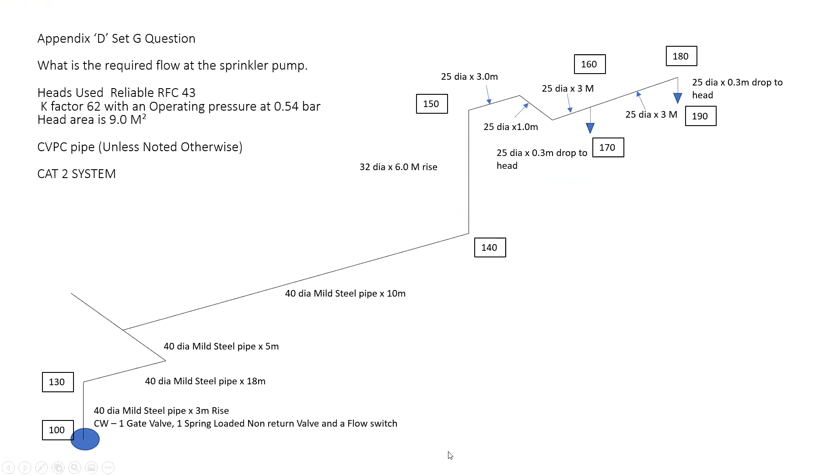So we open Canute, so just open that, and we're going to say File, New. Project name, so we'll type in here 123 Anywhere Road. Okay, and the address is the same. Project number would be 1234. Designer's reference is D.Duck.

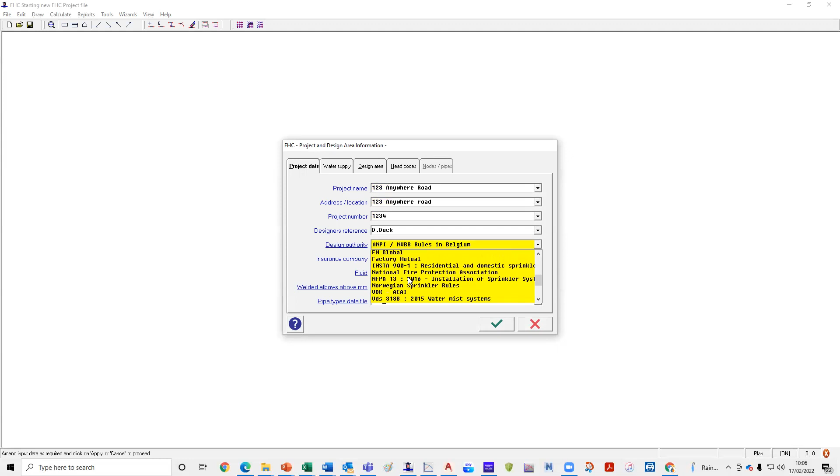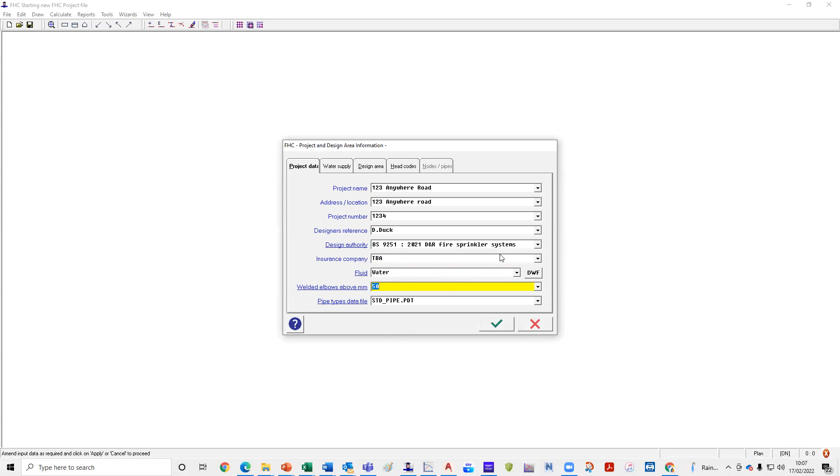Okay, design authority. Now you can select anything here. So what we're actually looking for is BS 9251 2021. See that there? So pick that. Insurance company, we'll put TBA. The fluid's going to be water and welded elbows, I will just say over 50mm. Okay. We'll leave standard pipe sizes in just now. I would suggest you don't put the water supplies in. You can work that out at the end.

Go into your design area and we'll put in here most remote. We're only going to run a most remote calculation on this one. However, if you have got a pumping tank, you'll need to do one for most favourable. Installation number 1. Hazard classification, you've got a drop-down menu, so we'll just put domestic. Design density for this one, because it's category 2, is 2.8mm a minute. And because we're running off head numbers, we'll not put a design area in.

Drawing number, we'll just put your drawing number in there, 1234 Rev 1. Issue number, that might be A, and then any comments in there. Okay, so we've done the project data, we've done the design area. Okay, now just while we're in here, we can look at the head codes, and the standard head codes have been loaded into this already.

Okay, so we'll tick that, and when we tick that, we will get a start node. 100 always starts at the pump. Click OK in that one, and then it'll ask you to save it. So I'm just going to put that in my desktop just now. Okay. All right. So this is how we start. Start node number is 100, and then end node number is 110.

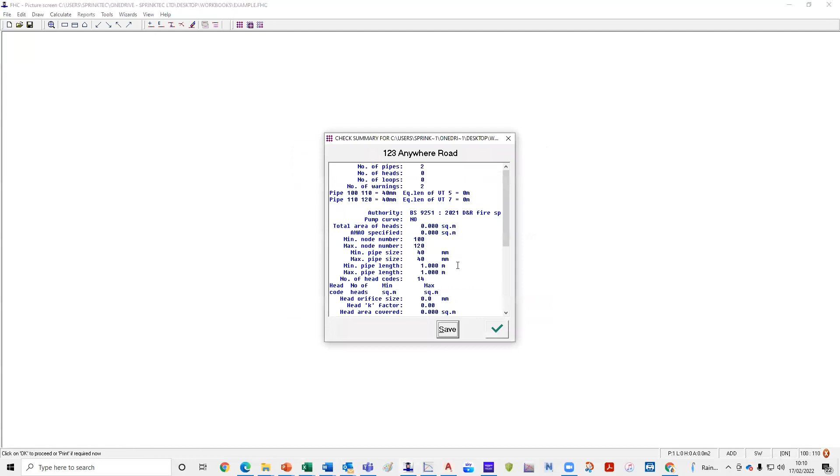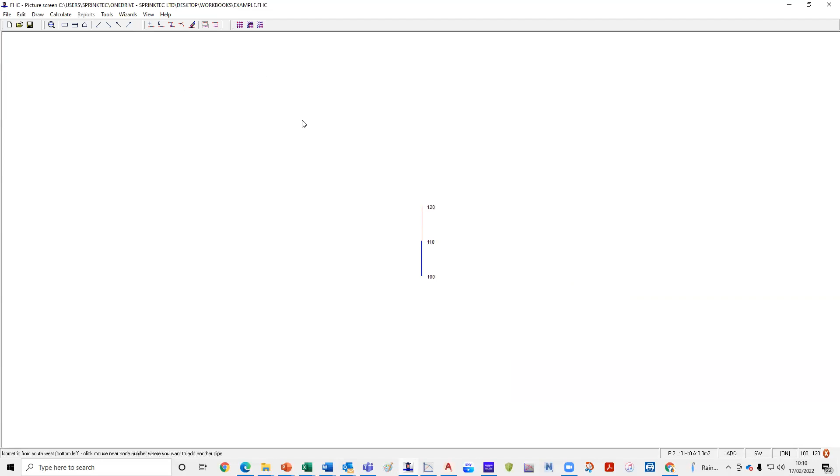You right click, you can just look at the pipe lengths, and you can also look at the pipe sizes. And if you go in here, if you look at fittings, it'll give you gate valve and NRV for check valve, basically. Okay, come again, click the top of it, up, 1 meter again.

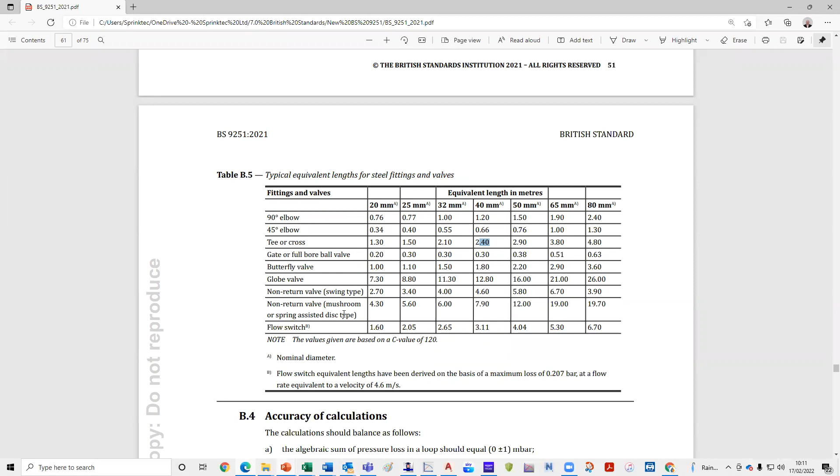At this point, we're going to add a flow switch. Now, interestingly enough, the flow switch here isn't in here. Okay, so what we need to do, we need to go into our British standard, and in our British standard, that's for steel fittings. If we go to 40 mil pipe flow switch, the equivalent length of flow switch is 3.11 meters.

So we'll get rid of that. And what we'll do here is we'll add in here an additional length of 3.11. Okay, and that's the equivalent length of a flow switch that you've added. Okay, smashing. Okay, so that's us up here.

Now, once we get to the top of the rise, what we want to do is click here. At this point, we're going to go east, and then at that point, that is 18 meters. So what we can do in there is say 3 meters. Okay, we're going east, 40 mil, mild steel pipe, and at this point here, we'll just add in optional items, and to keep it nice and short, we'll put in 15 meters here.

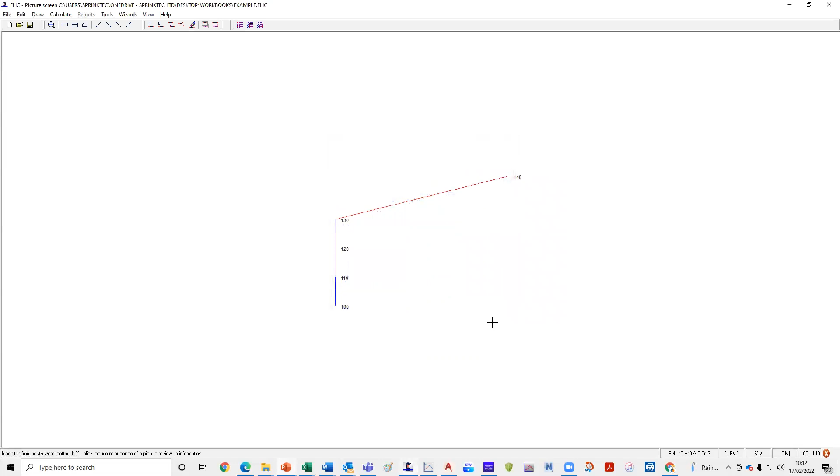So that gives me an extra 15 meters. However, when it draws it out, it's going to keep it nice and neat. Okay, so 3 plus 15 is 18 meters. We'll tick that. Okay, and then we'll add another pipe here. At this point, we are going to go north. Okay, and we've got 5 meters there, so put 5 in.

Tick that. Okay. Now, because on the drawing it shows it as a T, what we need to do is go north again and just put a little meter in, and that will then indicate that there's a T there. Okay. Righty. Again, click this part here, and that will give me the node number at 150. We're then going to go east again. At this point, it's 10 meters.

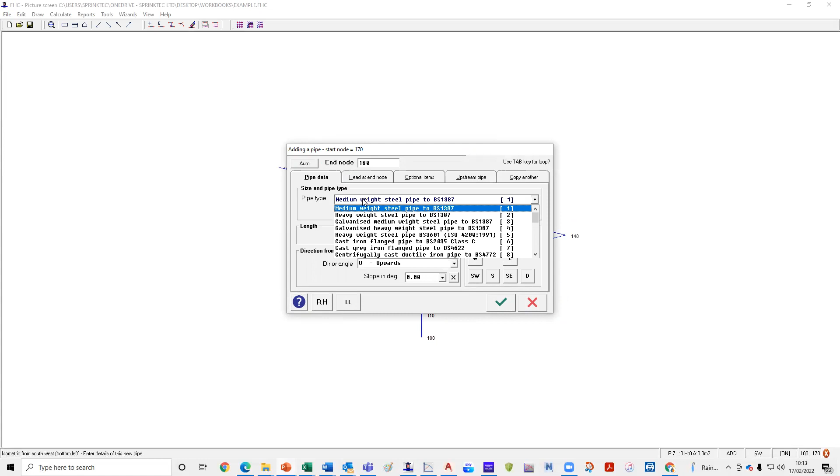So again, we'll go east, click that, we'll put in 3 meters again, and again, we'll go to optional items and put in 7 meters. Okay. And then another pipe, we'll come here. At this point here, we're going to go up, and it's 32 mil. So at this point here, we actually change to CPVC. So we'll come down here and we'll select that pipe there.

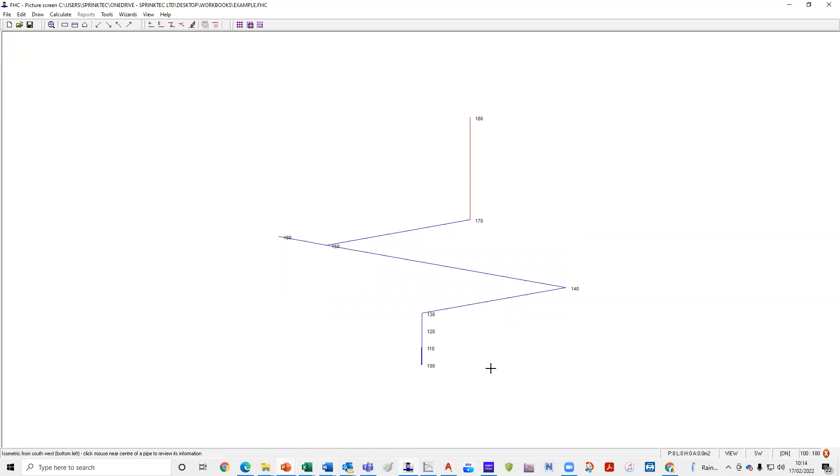Okay. So once you select that pipe here, basically you would come down, click here, 32 mil pipe. We're on the rise, and we're going 6 meters on the rise, so we'll just make that 6. Okay. What I would say though, you can't put equivalent lengths on rise pipes. It has to be the actual rise pipe itself.

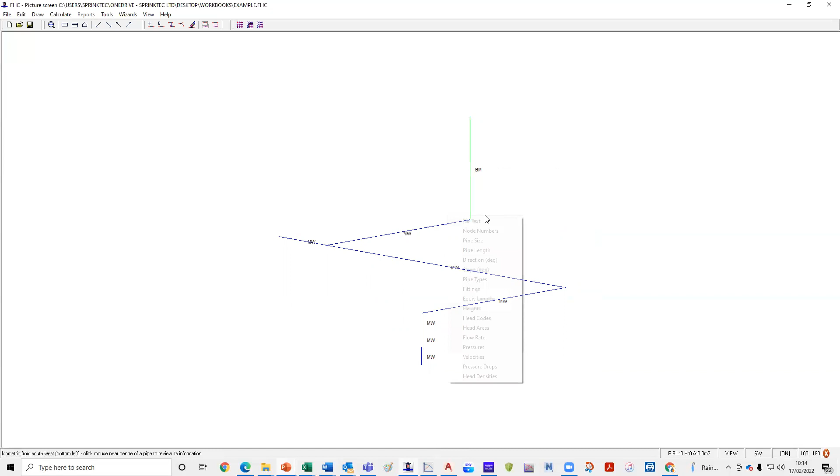So we'll do a quick check here, the pipe lengths. We've got 3 meters up here, 6 meters here. We've also got pipe size, 40, 40, 40, 32. And then you can go in here and say pipe type. Where is it? Pipe types here. See that? Medium weight, BlazeMaster. Okay. Okay then, so we're happy.

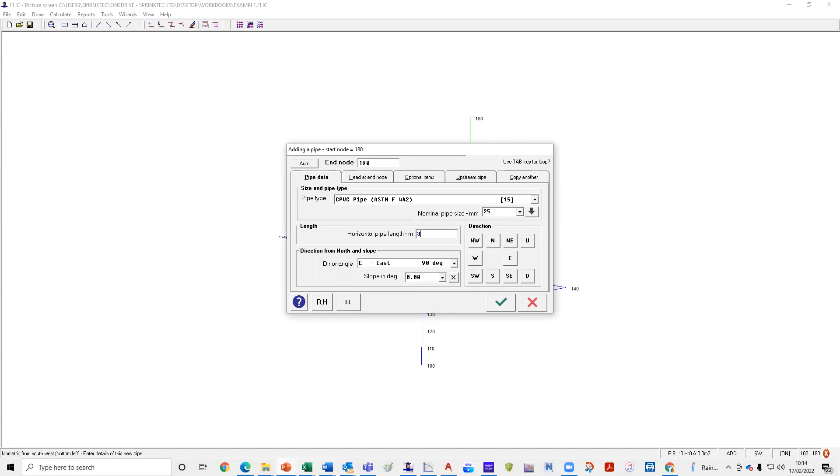We'll add another pipe here at 180. And we're going to go south this time. No, we're not. We're going to go east. Right, so at this point here, it's changed to 25. And we have a 3 meter long pipe. Okay, so tick. Then we add another pipe here. Okay, 25 mil pipe, and it's at 1 meter, so 1, tick.

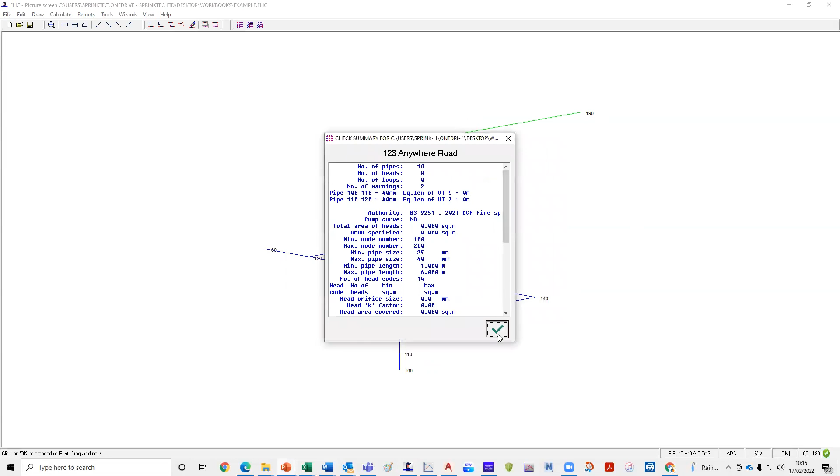Okay, and again, we're going to add a pipe here. And this point, we're going east again. And then we're going to go 3 meters, it's 25 mil. Okay, tick again. Okay, and then we've got a drop pipe to a sprinkler head here, but we'll come back to that. We'll add another pipe here. We're going east again, coming there, and that's 3 meters also. Okay, so tick.

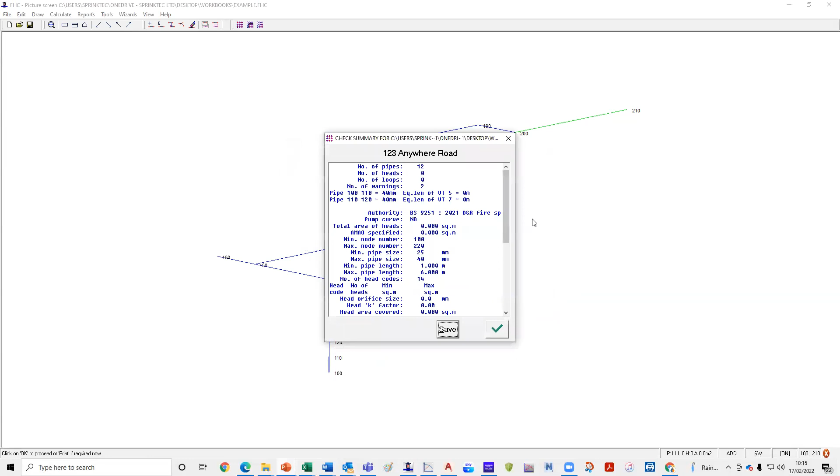Right. So this has done most of the sprinkler pipes at the moment. So the next thing here is we want to double check we've got the head. So it's a K factor of 62 operating at 0.54 bar. So if we go in here and go to project data and go to head codes, we want to look for that pressure and that K factor.

So the K factor's down here and the pressure's down here. So there's nothing here that says 62 at that pressure. So we're going to need to add one. So we'll put in here, add. The orifice is the thread size, so that's 15 millimeters. The K factor, which is on the question, is 62, and the minimum pressure at that head is 0.54 bar. And we'll make that a reference of RFC

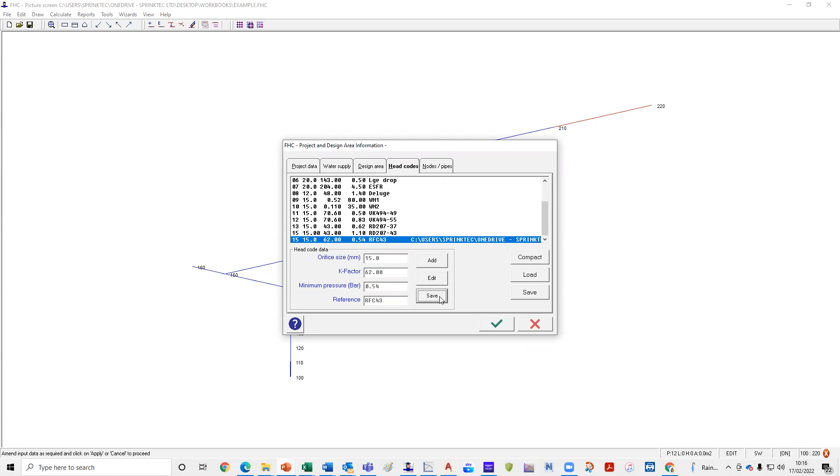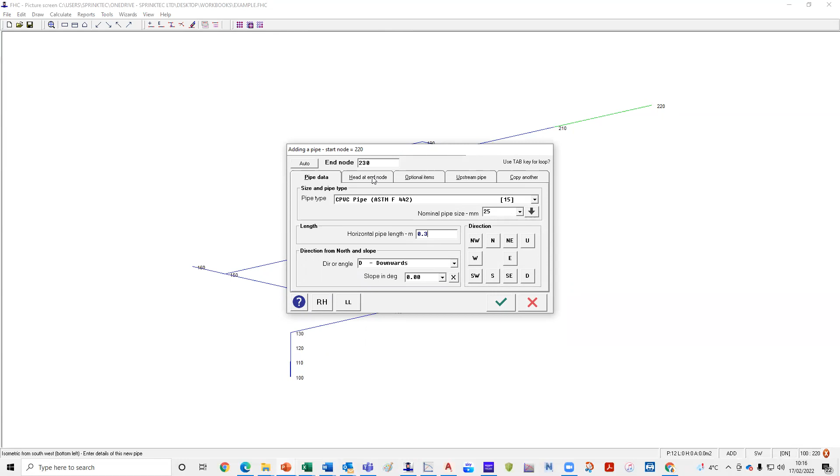43. Okay, we then save and add. Okay, and close that down. When we get to here, we click down here, and we're going to go down. And at that point, we've only got 0.3, so it's 300 millimeters, so it's 0.3 meters, 25 millimeters. We then go to head, click this down, scroll right down to the bottom, select RFC 43, and put in here the head area, which is 9.

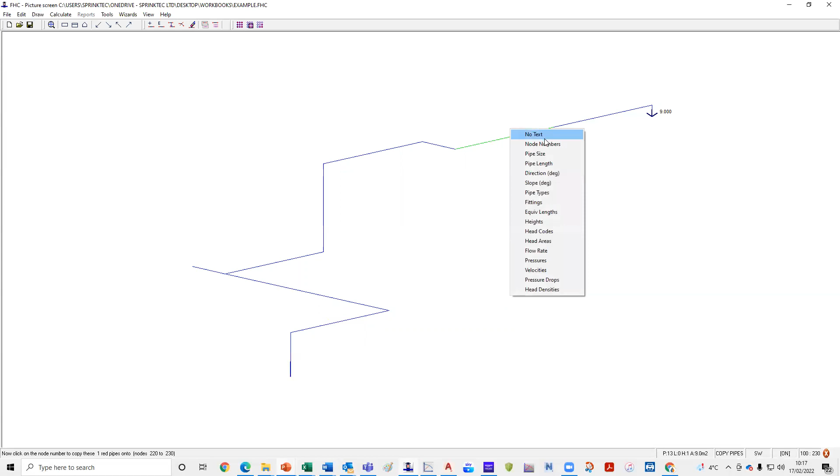Okay. And we'll tick that. So you get the head at the bottom of the pipe here. You can right click on that and you can put head codes, that's 15. You can check head areas and here, which is 9. Okay. Now, the one thing you can do here is you're going to draw, and then you can say copy by selection. Now, if I select that here, it'll pick that pipe. If I say node numbers, then I want to click here, put node numbers in here.

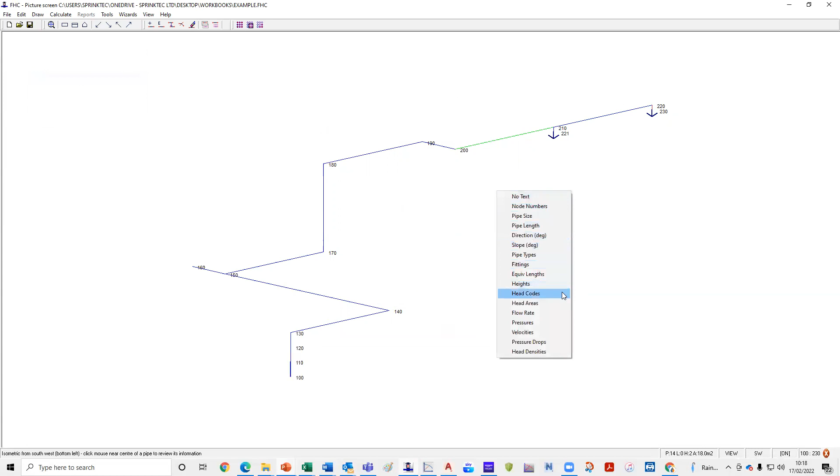So draw, copy by selection, or Control C, any Windows program. You hit tick, and that puts the head in here. So there we have it, we've drawn it out. Okay, so that's fairly easy. Right click, you can just run through it, check your pipe lengths, check your pipe sizes, check your pipe types, head codes, all that lovely stuff. So pipe types in there. And just double check it against your drawings.

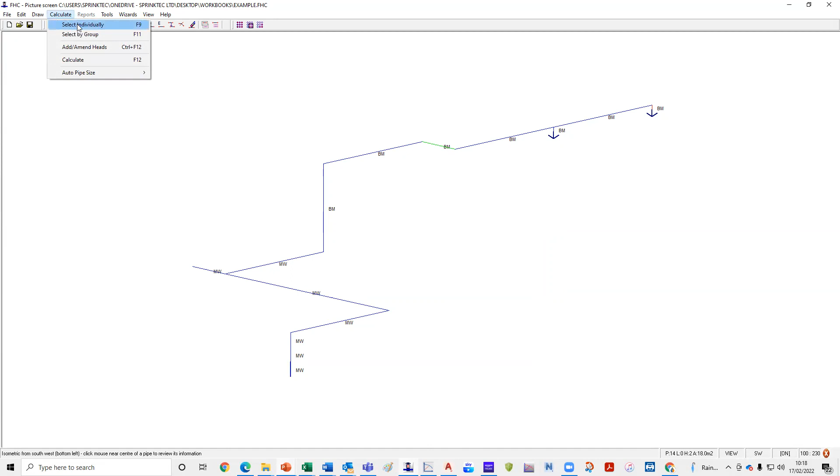Okay. Right, so what we want to do here now, we can go calculate and we can select by group. So you can either click that and then you just draw a square around it, or you hit F11 and draw a square around it. Okay, at that point there, you can either click that button, you can either go into calculate, or hit F12. There's 3 ways of doing it. I tend to pick F12. Okay, calculate. When you get that, it will tell you 2.8 over an area of 18 square meters. So that's the 2 heads in operation.

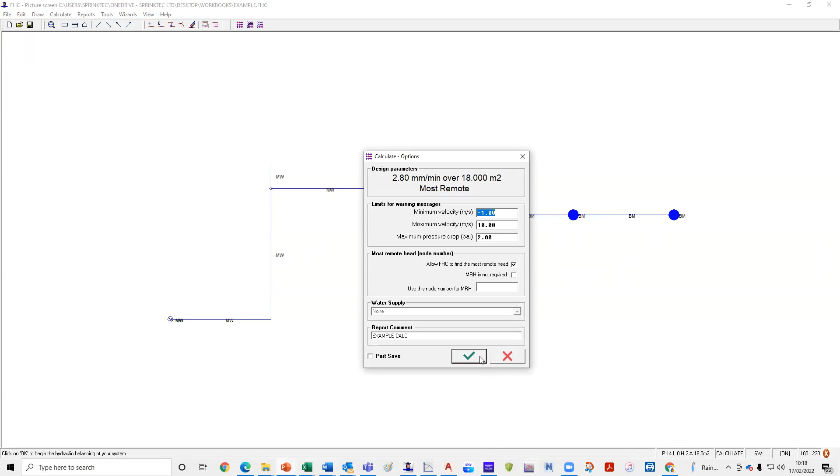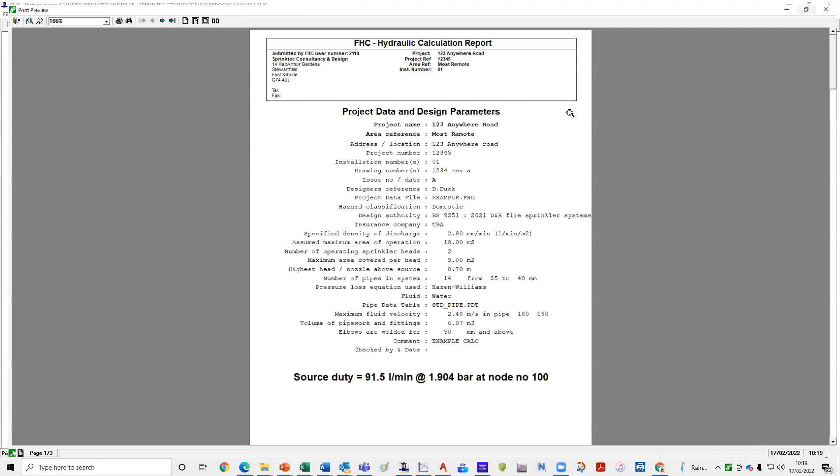So you'll say tick, and that will tell me that the flow that I need is 91.5 at 1.904 bars. So tick that again, that'll close it down. If you go to reports, calculation reports, it'll give you the details here. Okay, so that tells you the most remote area, 1, 2, 3 Anywhere Road, Donald Duck, domestic, and it gives you all the details here. Also tells you what the maximum velocity is through the pipes and the volume of the pipe. Okay, so yeah, that's that.

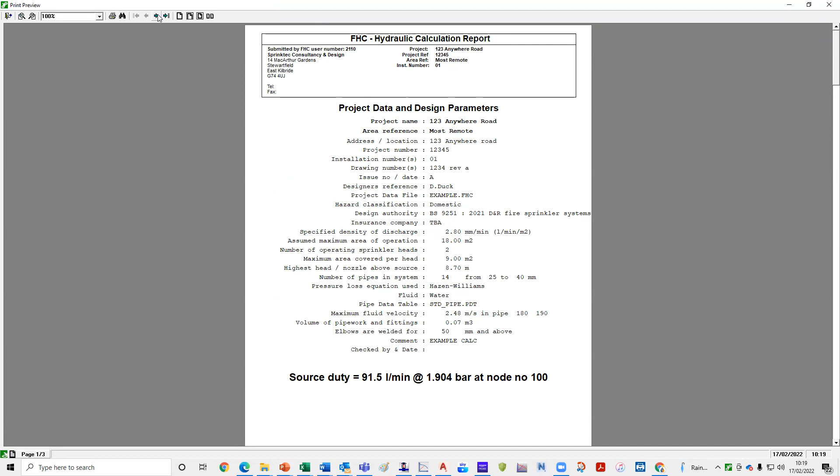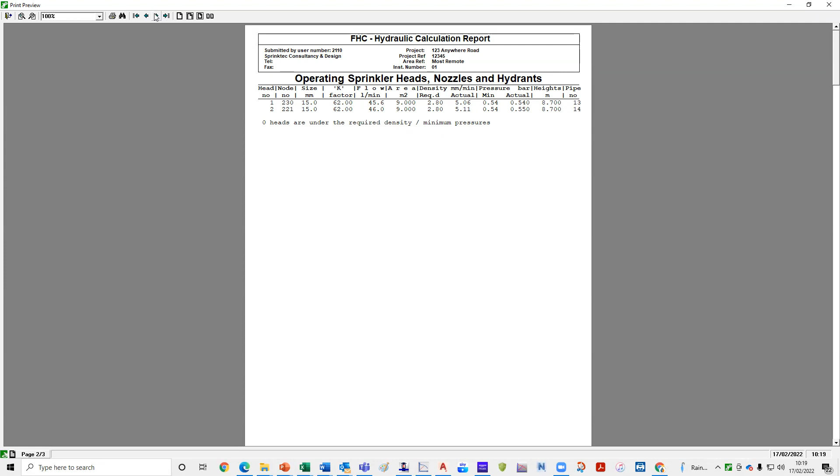And if you want to find out more about the heads, you come in here and you'll say, right, that's the node number the head's on, that's the size, that's the K factor, that's the flow coming from the head, and that's the area it's covering. That's the required density, and that's the actual density we're getting. That's the minimum pressure, and that's the actual pressure. And that's the heights each head is at, and the pipe number. If you go to the next page, that basically then tells you all your pipework details. So if you want to check your pipework, you can do that. Okay, we'll shut that down.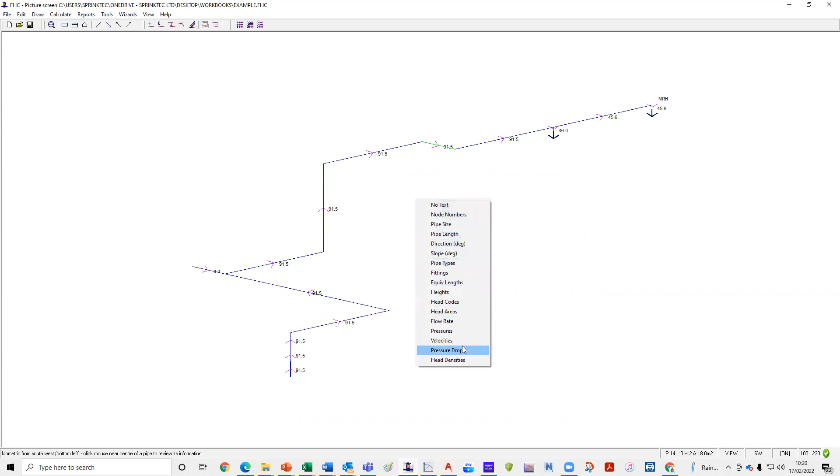Okay, so that's that. Now, the other thing you can do here is you can right click, you can go to the flow rates, and it'll tell you the flow rates coming down each pipe. So we've got 45.6, 46 coming from that head, 91.5. It'll also tell you the pressure drop. It tells me here that I'm losing 0.018.

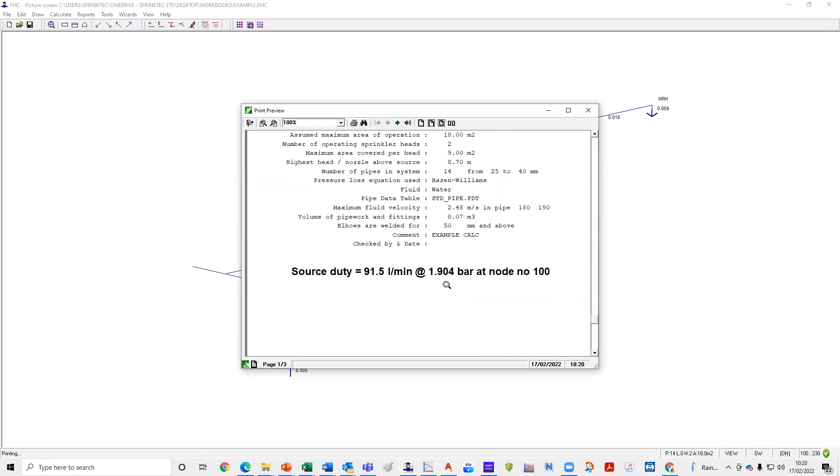Okay. Now, how does that relate to the hand calculation that we did? So the hand calculation here is, we worked it out at 2.115. So we're 0.2 of a bar difference. Sorry, we're not. 1.904 against 2.115. Here we are. Okay. Not too worried about that. 0.2 of a bar.

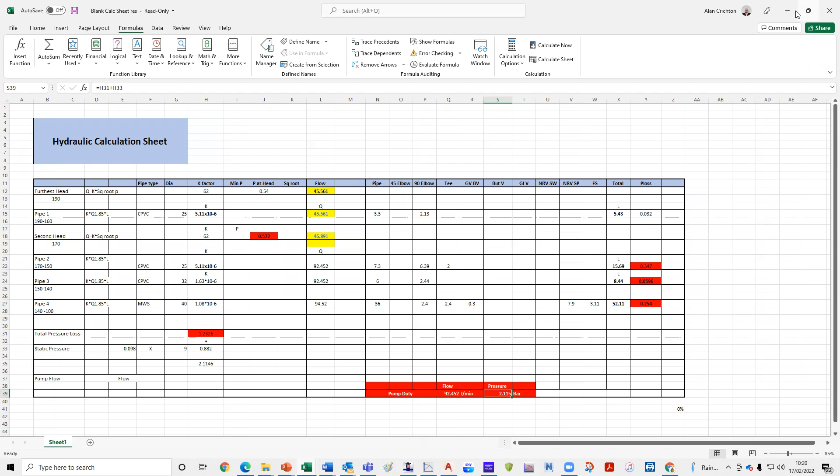Okay, so pretty much that's how you use Canute. It's not really that difficult. There is a lot more functions on it. And if you want to learn them, it might be best to go to the Canute website and book yourself into one of their courses. Okay, so hopefully that'll be enough. And yeah.